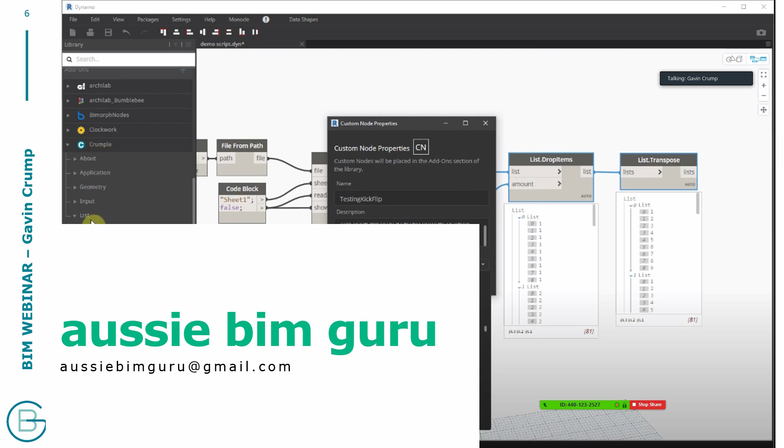Some of you might be familiar with my YouTube channel, called the Aussie BIM Guru. You can always contact me at this email if you've got questions about BIM or Dynamo or other programs. I launched it last March - it's got 150 plus videos, and we've just got over about 5,500 subscribers now, so it's growing pretty fast, which is pretty cool.

I've got videos coming out twice a week typically, and I'm going to try to keep up that momentum as long as I can. I cover a lot of topics, but most of them relate to software, so I show demonstrations of how you can use programs like Autodesk Revit, Dynamo, and Python scripting.

I also touch a little bit on Grasshopper for Rhino 3D, for those that use that program instead. I know that's usually more popular at universities, but I also talk about general BIM management and how you can be a better employee and improve your career prospects.

So my goal with the channel is really just to help other people improve their BIM with professional context, because there's a lot of channels out there that aren't managed by people working in the industry yet. So I find there's a little bit of misinformation, and I try to give you a more honest, professional approach.

So I've got a whole bunch of playlists. I've got like about 63 videos on Dynamo, 42 on Revit, and just made a series on Python from the ground up. So feel free to check them out if you're looking to learn a little bit about those programs. And yeah, I've got plenty of videos. You'll be able to recognize them by this little symbol, the Aussie BIM Guru logo. I've had the same branding since day one, so pretty easy to spot.

Anyway, currently I work in a business called BIM Guru. So similar to Aussie BIM Guru, but a little bit different. This is my consulting business. I launched it at the start of this year, so a very interesting year to begin a business, I'll be honest.

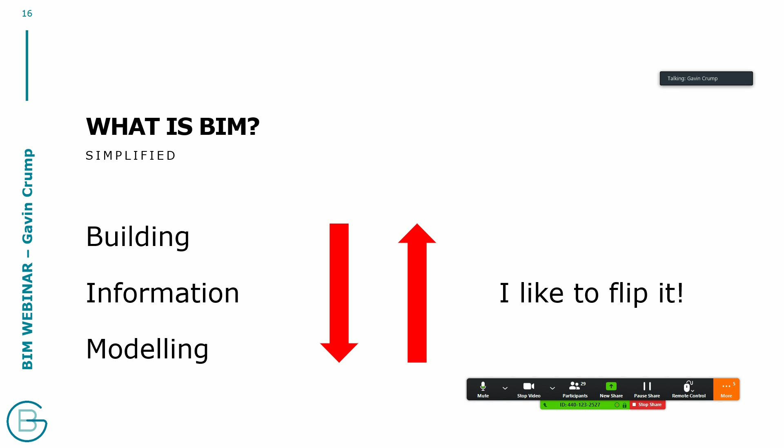So what is BIM? If you're not aware of it, it's Building Information Modeling, that's what it stands for. But when I talk about BIM, I like to flip it and turn it upside down, and I like to say modeling in order to generate information, to construct, to create and support buildings. Because one of the most important things in BIM is it's actually in the middle - it's the information. A lot of people think BIM is just 3D modeling, and it's not. It's so much more than that.

So software in BIM is really important. You can't really do much without it, but BIM is enabled by software. So essentially BIM is really more about process, workflows, and communication.

You can be the best 3D modeler in the world, but if you don't know how to communicate your ideas, it's not really worth anything. Communication is one of the biggest challenges and most important things to refine as a professional, but also in the industry in general. If you run a business, you should be a strong communicator, so it's really important to value this even in BIM as well.

I like to look at BIM a little bit like a barista making a coffee. The end depends on the means, but it's not about the means. The barista isn't just the coffee he makes, he is the process that makes the coffee. Same with BIM - it's the process that generates the outcome.

So who can use BIM? The good answer is you all can. Everyone in AEC can have something to do with BIM in some way, as long as they're involved in the process of generating or using a piece of the built environment. You can do something with BIM.

This could be architects, engineers - not just structural or civil, also mechanical, electrical, hydraulic, fire services, all types, geotechnical, surveyors - but also contractors. If you're on a building site, a lot of builders are now using BIM models in order to track the progress of construction and also to solve problems before they become a problem on site.

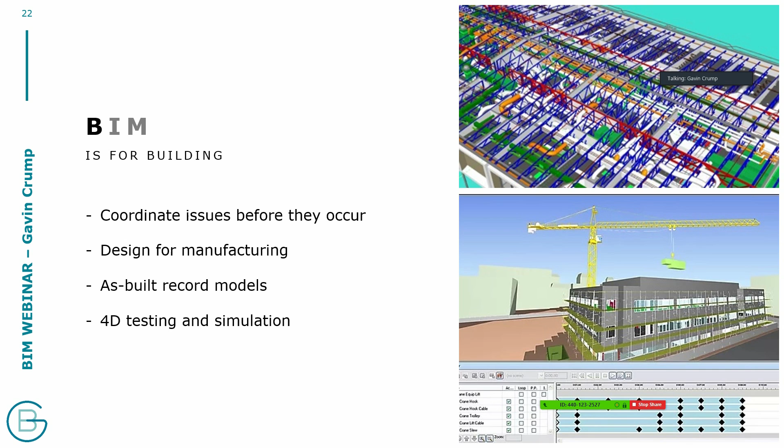Yeah, definitely interesting. As well as this - sounds like there might be someone with their microphone on, just might want to mute.

And now you can analyze every component in that system together. So you no longer have to do really complex calculations on paper. Now the model can actually do a lot of this for us. So there's not as much need for interpretation of elements, which is really time saving for our industry. And it means we make fewer mistakes typically if things are set up properly.

As well as this, we can connect our models to live schedules. So we're no longer maintaining an Excel schedule on the side of an AutoCAD drawing, for example, where there's no connection between the drawing and the Excel, aside from the person that's manually doing everything. So that's a really big time saver.

And we can also connect all our data to databases. So we can now put things on the web. We can web host all of our data, so that we're seeing a lot of really new, exciting, powerful apps that are able to leverage our data much more intelligently than anything could ever have been before BIM.

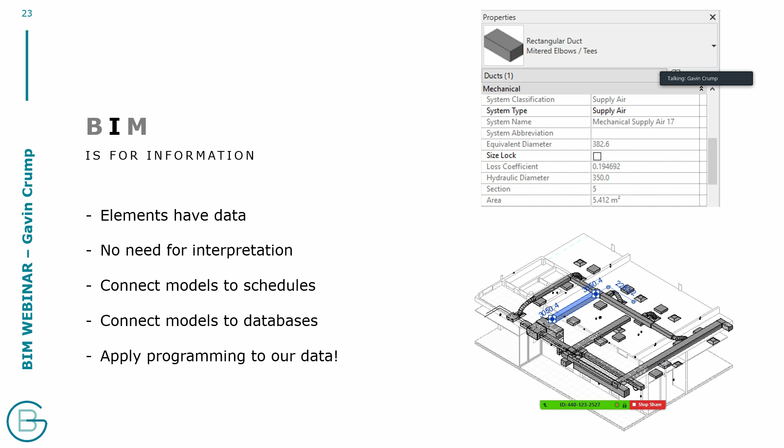And as well as this, we can also apply programming to our data. So we can apply programs like Dynamo and Grasshopper, and even just Python or C# in general, to build apps and scripts that can actually speed up how we work. And I'll cover that near the end of this presentation.

M is for modeling. So you can find issues in 3D that you'd miss in a plan or a section, which is really time saving. And as well as that, one of the great things, which I will show you a little bit later, is that if you update a model in BIM, your drawings update as well, because you're not just seeing a 2D drawing, you're seeing a representation of a 3D model. So when you create a floor plan, you're not drawing that floor plan, you're cutting through your 3D model and then drawing over the top of that. So it's a really powerful way of saving a lot of time in manually updating drawings.

For example, in AutoCAD, typically people used to have to manually draw their sections. And then if a floor plan updated, they had to bring their section in, line it up to their floor plan, and draw these lines to check where things needed to be aligned to. So a big waste of time that we no longer have to worry about.

As well as that, we can walk clients through these models in real time, which is really immersive for our clients, because you've got to remember, in architecture and engineering and construction, a lot of the time the client doesn't understand what we're doing. We might show them a floor plan and they don't know what they're looking at. They don't understand how to read a floor plan, because essentially a floor plan is just a set of instructions. So if they don't know how to follow those instructions, it's not really going to mean anything to them aside from what they can visually see. So this really gives us a lot of power.

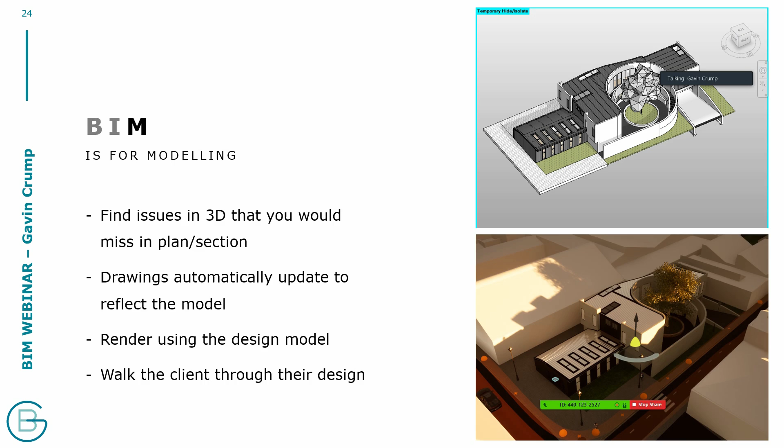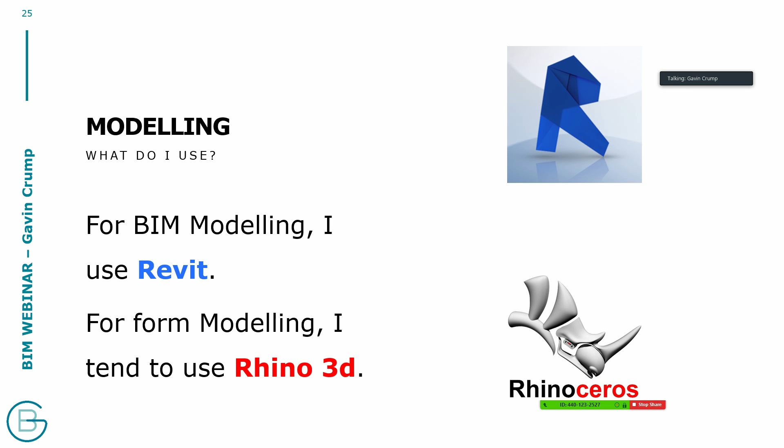So modeling, I guess I'll just touch on the programs that I use. For BIM modeling, I typically use a program called Autodesk Revit. It's one of the major BIM platforms in the industry. As well as this, if I'm doing more complicated 3D form modeling, doing things like modeling with NURBS, which are non-uniform rational B-splines, so double curvature surfaces and more complex geometry, typically I'll use Rhino 3D. I find that these two programs together can do most things that I need.

So this is an example of Revit. I've actually got Revit itself available to show you as an example. So this is a Revit model. I'm in Revit right now. I can go in 3D. So this is my 3D model. And I can also interrogate elements. I can click on them and see their properties. For example, I've got an in situ concrete wall. I can go in its structure and see that I've got concrete that's 200 millimeters thick.

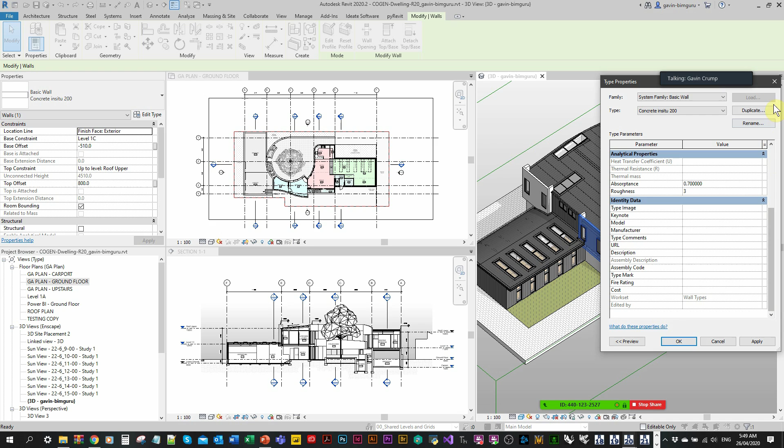And there's more data I can populate if I so choose. This isn't a very data-rich model, but you can see just that there's a lot of fields and parameters that you could populate. You can go far beyond that, obviously. This is just an example.

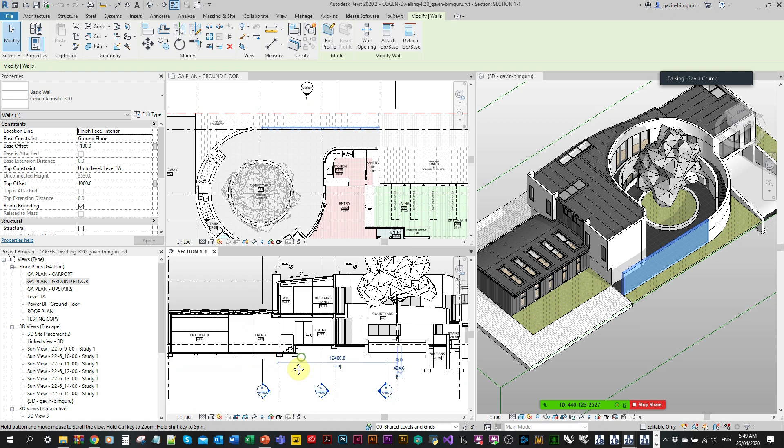But as well as this, I can also look at things in 2D. So I can go to a 2D drawing, but if I select this wall, for example, see I'm selecting the same wall. So now I'm dealing with a 3D, 2D hybrid environment, which is far more powerful. And I've got a section here, so I can look at elements in section, I can see their cut representations, and I can see I'm no longer drawing these. These things are actually generated in 3D. So far more powerful than anything we had before.

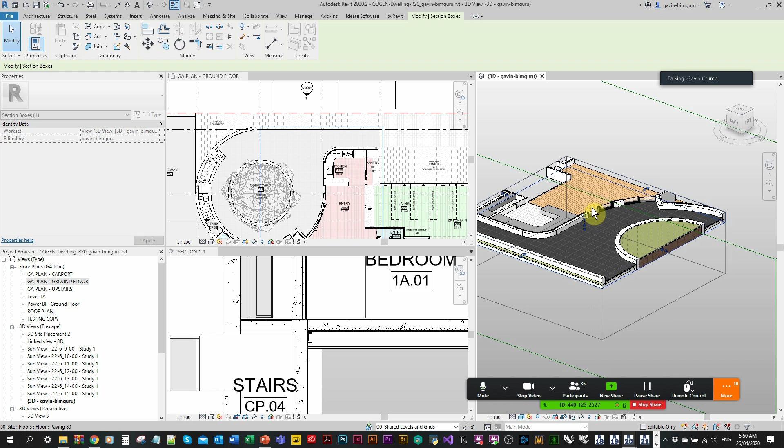And let's say I want to really interrogate an element. Let's say I want to look at this floor in 3D. I can generate a little cutaway and really interrogate my model and get quite a lot of detail out of it. So BIM's sort of like what you put in is what you get out of it. So the more modeling you do, the more detail you'll get and the more information you can extract from your model. So it's quite an exciting thing that BIM does for us. So that's one example of what I use.

But there are other programs too. One of the really popular ones is called ArchiCAD. This is very popular in Europe in particular, run by the Nemetschek group. And I find this is probably the biggest competitor to Revit. And it's a great program. It does BIM really well. There are some things that it does better than Revit. But at the same time, Revit does some things better than ArchiCAD as well.

There's quite a polar divide between the user bases for these programs, mainly because the only way to work between them is to use a format called IFC, which doesn't work too well in Revit. So there are some challenges depending on which program you pick.

But as well as that, there's other less popular but still used options such as Allplan. And then there's some programs that aren't really BIM programs, but are still used in sort of a way that a BIM model would be used, such as SketchUp, which you might be familiar with if you're a graduate. Quite popular because it's got a free version, and also Vectorworks as well. But really, they're not really BIM platforms. So it's more ArchiCAD versus Revit that seems to be the biggest divide, the two most popular platforms.

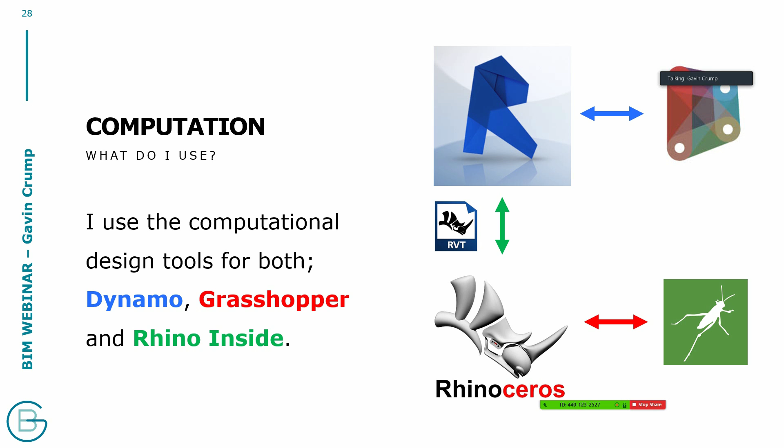For computation, which programs do I use? So typically for computational design, if I'm working in Revit, I'll be using Dynamo, which comes with Revit. Otherwise, if I'm working in Rhino, which is the main reason I work in Rhino, I'll be using Grasshopper, which is far more powerful at processing geometry, but not as good at processing data typically. And as well as that, there's now a tool that's been built by the people that make Rhino called Rhino Inside. And this actually lets you run Grasshopper within Revit, which is really powerful. So I'll show you an example of that shortly.

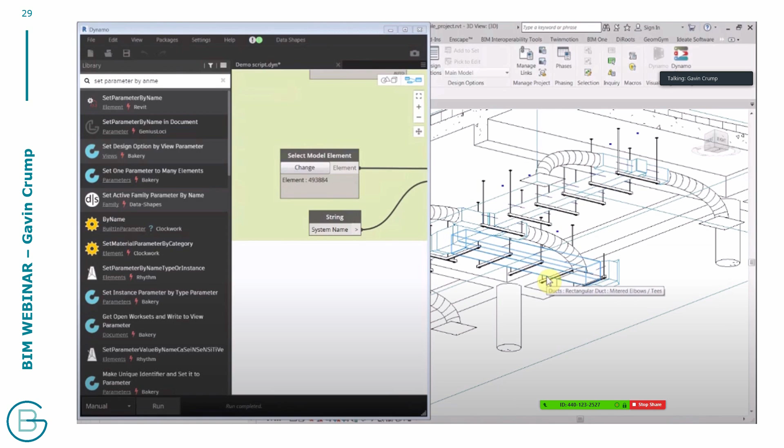This is an example of a Dynamo script I built that essentially takes a duct system, and given a hanging support family, if you select one duct in the system, it goes and supports the entire system for you automatically based on some spacing rules, just all by using a script. And when you run it, you can pick new systems and just keep going. So it saves a lot of time if you can write something in a scripted manner.

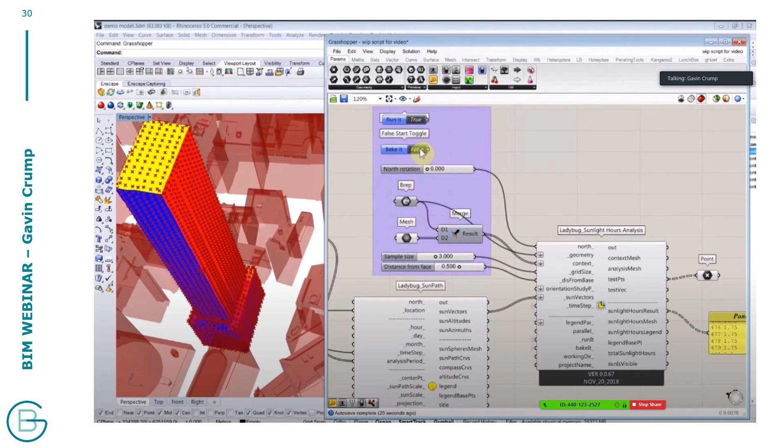This is a software package called Ladybug for Grasshopper and Rhino that deals with solar analysis and other environmental studies. And this is more the power of Grasshopper. It's very fast at dealing with geometry, very complex geometry. For example, if I ran this study in Dynamo, it would crash. It wouldn't handle it. So you can do some very powerful and very abstract concepts using Grasshopper instead.

This is an example of Rhino Inside, which I'll probably actually just show you because I have this ready as well as an example. So I'll just boot up Rhino and I'll boot up Grasshopper. So I've got my Rhino model here and I've got my Revit model here. So this is actually some geometry that's been processed into Rhino, and then I'm analyzing this using Grasshopper.

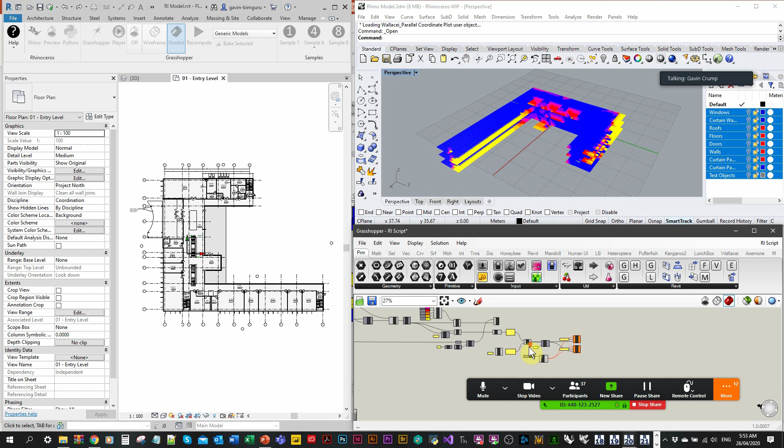So I've got a pretty complex script here. And essentially it's finding how many hours of sunlight every square meter of the Revit model is exposed to based on all the obstructions. So I do have all the Revit elements hiding behind the scenes.

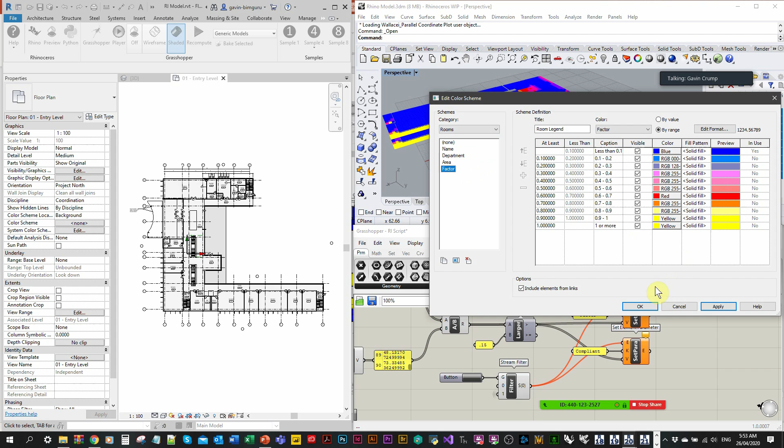But what I can do with this is actually collect this as data. So I can find out how many hours on average each room is receiving per square meter. And I've created a little color scheme that I've applied. And this will technically tell me each room's factor. At the moment, every room thinks it's receiving 0.

If I run my Rhino.Inside script, it'll update all these rooms and tell them with a number how much they're receiving. Then my color scheme can tell me graphically how compliant my rooms are. So you can see the power of just combining a few programs and capitalizing on their strength in order to create a workflow that supports something more complicated.

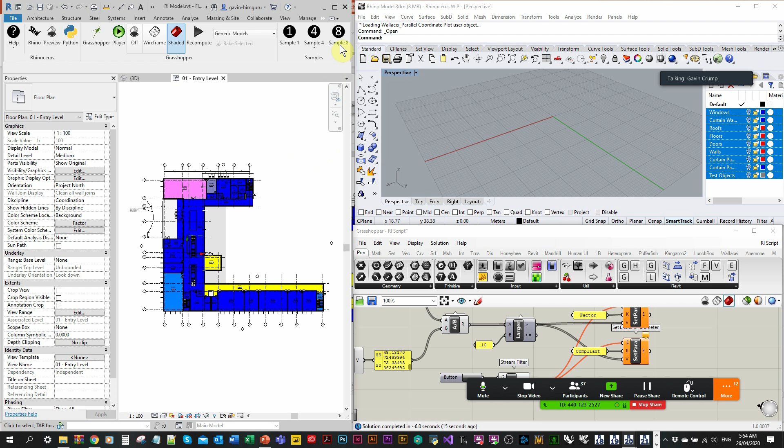I'll probably have to close this program just because it's a little bit heavy when you've got it all set up. So I'll just shut that one down. And it should close down Rhino and Grasshopper. So I definitely recommend looking into that as an option.

So there's some other programs out there as well that deal with computation. One that I'm looking into right now is called Node-RED, which deals with web-based operations, so dealing with servers and databases and websites. So this paradigm of visual coding is getting quite popular, and I'll touch on it a little bit later in this presentation.

But a lot of professionals are actually learning programming. So this is a really interesting thing that we're seeing in the industry. We're seeing people learning not just Python, but also C#, and some people learning JavaScript to deal with web-based applications. So if you like computer programming and you wish you'd become a computer programmer, the good news for you is you can probably still be a computer programmer in AEC.

If you don't like computers, I've probably got some bad news for you in that the AEC industry uses quite a lot of computers. But it's really interesting to see the impact that coding is having on our industry and its efficiency.

So I think there's someone with a microphone on. You might want to mute your microphone.

Anyway. As well as this, now that I'm talking about programming, I should probably mention a company called DiRoots, because one of the people in our webinar, Adeji, a little BIM celebrity, is actually working with this company, and they're raising awareness, and they're doing a great job too. They're a BIM consulting company, so we're not really in competition. I think we all just support each other, and they're developing some free tools and workflows for Revit using programming. So really interesting to see what some of these companies have managed to do.

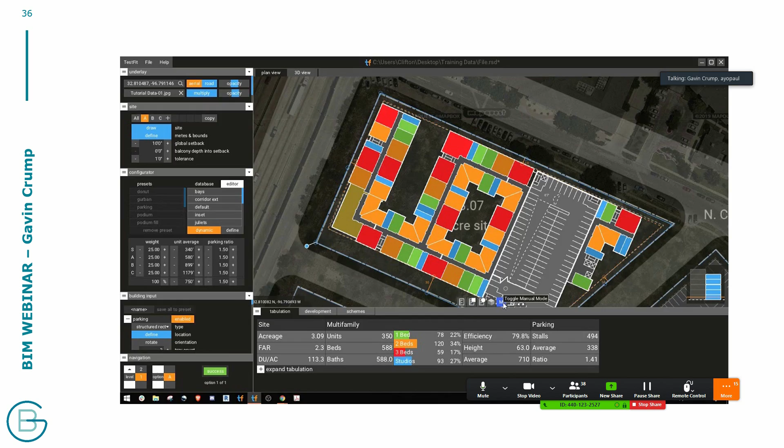As well as that, for coordination, I typically use a program called Navisworks, which works hand in hand with Revit. So this is really important for a process that we call clash detection, which tells us when things in the model are intersecting with other things or they're coming too close to other things. For example, if a duct is clashing with a structural wall. Typically this is a problem because we need to use a penetration, which gets in the way of the structural reinforcement of the wall. So it can be done, but we need to be aware of it. So we can use clash detection to inform us.

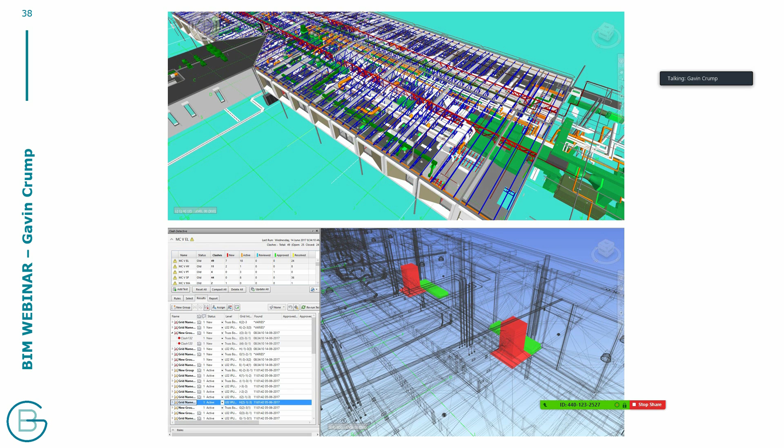And this example I was talking about before is actually also an example of clash detection. So we used this model in Navisworks above to detect issues. For example, down below you can see we've identified when there's some ducts and some lights in the ceiling that are clashing. Obviously you can't have a duct and a light on top of each other. So this forces some coordination to occur between a mechanical and electrical design engineer. So it's a really powerful workflow to be aware of how to use. So I highly recommend people check out these sorts of programs as well.

But I guess another popular alternative is Solibri. This is used typically by ArchiCAD users and some Revit users because it handles the IFC format instead, which is a universal file format generated for the construction industry.

It does sound like, you know, the perfect solution that one file can be read by all programs. It's not quite that simple. I'll talk about it a little bit later, but this is a good alternative at least. This is an example of someone using an IFC model in Solibri.

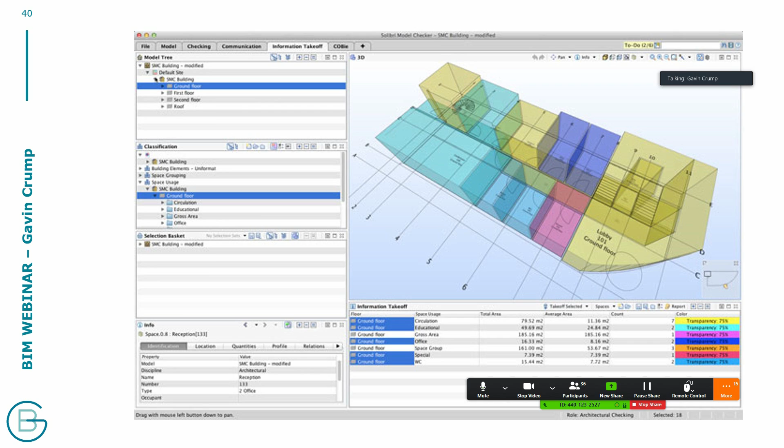For visualization, I use two programs. So I use one program called Twinmotion, which is a derivative of the Unreal engine. So if anyone's ever played Unreal Tournament, the video game, this is actually now a visualization engine in architecture, which is pretty fun. As well as that, I use a plugin called Enscape for Revit typically, but it's also available for Rhino and SketchUp and some other programs, I think ArchiCAD as well, that lets you render in real time.

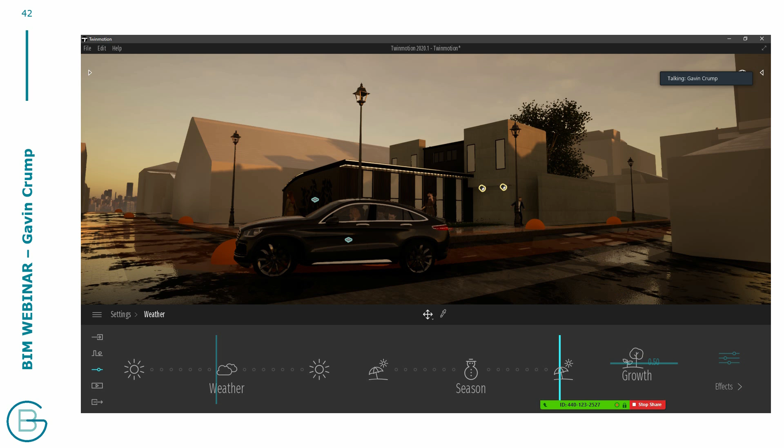So it lets you actually take your BIM model, like this one I showed you before, and put it into 3D. I've actually got this one available to show you as well, which is pretty fun. So you might remember this model I was talking about. So I've actually exported this to Twinmotion, and now I'm in my model. We can see that I can fly around my model. So it's like you're in a video game, right? It's pretty cool. And you can see the graphic quality is pretty decent.

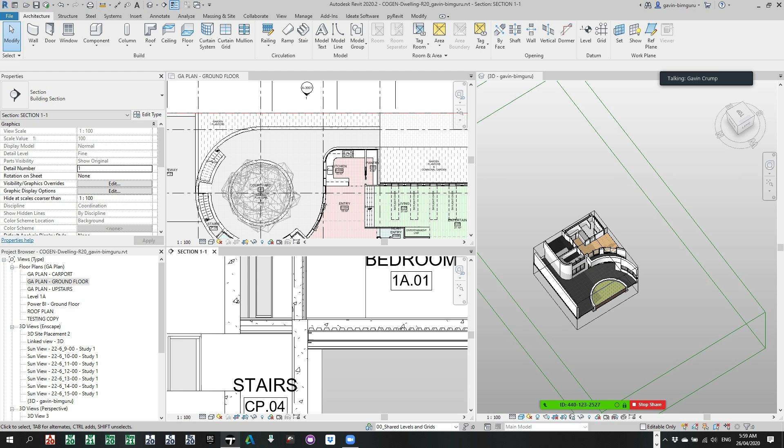And you can have a lot of fun in these programs too. I mean, you can find this little guy and you can make him dance. So you can have a lot of fun with these programs. And there's a lot of really quick things you can do to these models once you've set them up. So if you're showing this to a client and they say, oh, I'm in a snowy region, I want to see what this looks like in winter, I can really quickly just put myself in winter and you can see it starts snowing and everything gets covered in snow. You know, my trees update.

So there's some really interesting features and tools that are coming out like this to support what we do. This program for a while was actually free as well, which was pretty amazing. I don't believe it's free anymore, but if anyone got hold of it before then, congratulations, it's a great program. So yeah, really interesting. You see even the cars are driving around, so pretty fun. I'll just close this one too because that uses a bit of memory on my computer. So we'll just jump back in.

So that was Twinmotion. But there's some other alternatives out there. So some people just use Unreal Engine as it comes. They don't bother using Twinmotion, which is harder, but it gives you more power. It's essentially like designing a video game. As well as that, Unity is becoming really popular. This is a gaming platform essentially that lets you build video games. It was actually used to build a really popular mobile game called Hearthstone, if anyone knows that one. But it's come into AEC now as well. And also Cinema 4D is quite popular.

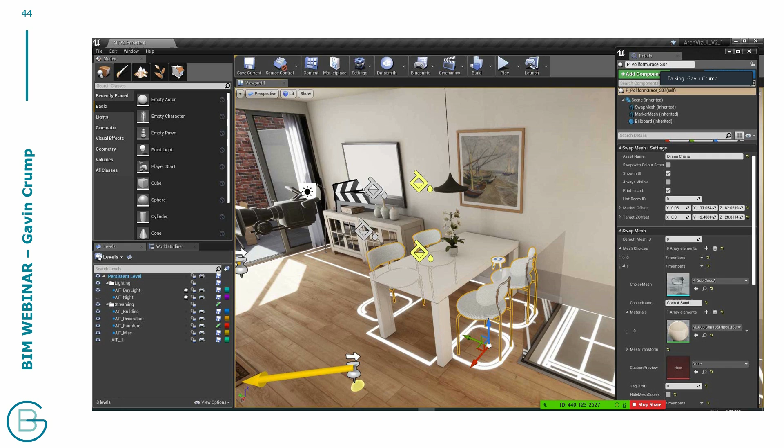This is an example of Unreal Editor and sort of the complexity of the program compared to the one I just showed you. But obviously with complexity comes more features. But there's so many more programs to choose from. I've just shown you probably some of the most popular ones, but there's more programs being made every day. So I guess the question comes, what is the right program to use? We obviously only have so many hours in our day. We can't learn every single program. Well, we could, but we'd probably have nothing else to do.

So I think it's really important to focus on a few things. Pick a program that firstly you need. Don't just learn a program for the heck of it. If you know you're never going to use a program, say don't go and use SketchUp for BIM if you know it can't do BIM, for example. But if you know you can do things with it, then sure, learn it because you might need it. Maybe your business is going to use this program.

At the same time, you have to enjoy it. I find too many people use BIM software but hate using BIM software. If you don't like using the program, then don't use it unless your company forces you to use it, and then find another company to work for that uses the programs you like. I think that's really important. You have to like what you do and you have to be interested in it too. I think if you're not interested in using a program, then again, don't use it, or find ways to work with people using the program but doing what you enjoy.

So if you're going to be an architect and you don't want to model in BIM, that's okay, but you need to learn how to coordinate people that do, because it's integral to how we manage our projects. So don't feel pressured to learn it, but at the same time, feel pressured to understand it. As well, you can always just try programs if you're not sure. Most of the programs I've showed you have free trial versions that you can actually just get a hold of and just try out the program.

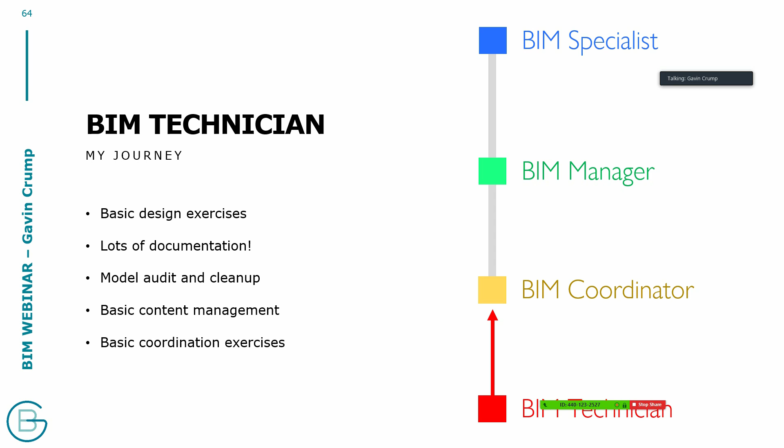And maybe some basic coordination if you're lucky. I was quite fortunate to be given some coordination tasks, actually working with engineers and resolving issues with them. Say like, I need a mechanical duct in this room, but there's no ceiling. Obviously the solution is put in a ceiling, but it was more involved than that. It was like, can we actually afford a ceiling in this room? Or maybe, why isn't there a ceiling? Maybe they've made a mistake. So that basic level of coordination.

But I guess during this time, I did one thing that I encourage everyone to do as early as possible, and that's to self-educate. Find the programs that you're passionate about, or find the techniques you're passionate about. Maybe you're not a BIM user, maybe you're an architect. Maybe you want to learn more about construction. Start researching details. For me, it was to research Revit - that was my big thing. I wanted to learn everything about this program because I knew I wanted to be a BIM manager very early. I loved what this program could do, and I wanted to manage teams that were using this program.

So every night for about 3 months, I learned Revit. I wanted to learn a lot more about the program, how it works, how it can be set up. And I guess projects didn't always teach me everything that I needed to know, because projects are all different. They don't explore every aspect of a piece of software, because a piece of software is built to handle a lot of different things. So if you're putting together a library, for example, you're not going to see the same things that you'd see if you were doing, say, a commercial building.

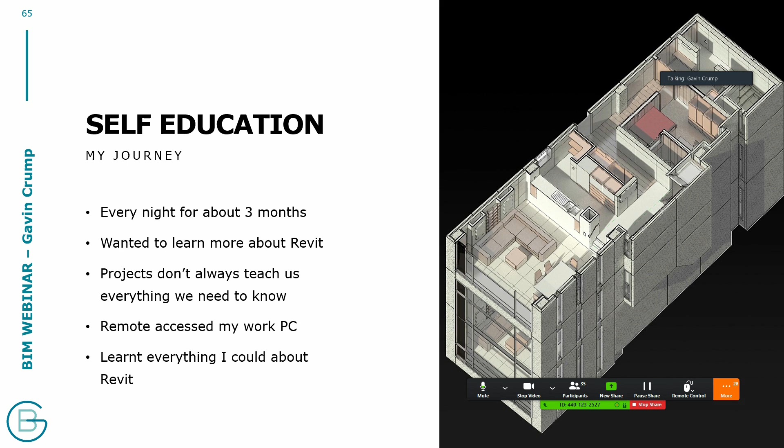For example, in a commercial building, we almost never model any furniture because there's no fit out - you need your tenants to fit out the building. Whereas on a library, obviously the furniture is much more important. So you might not learn how to build content in a commercial project the same way you would on a library. The same as working on a hospital, I didn't learn everything about Revit. So I actually just remotely accessed my machine from time to time to learn this program, and I learned everything that I could about it.

So this really boosted my career. It actually caused me to sort of leapfrog over a role in my journey, which is a BIM coordinator. I sort of skipped that role because I learnt the program so fast and it was so in demand. I managed to, I guess, get the attention of an office that wanted to elevate me up to a BIM manager. And I was very young, I was only 25 at the time. But I guess I saw the opportunity and I took it.

And it was the right choice at the time, but there were some challenges involved. So I think my lesson I learnt here is that you don't want to move too fast. It's tempting to go for the big roles as fast as possible, but you will miss out on things along the way if you skip certain roles.

So as a BIM manager, I moved to Sydney and I started developing all their templates, their library of objects. I started training their company because obviously my skills in Revit were at a different level to most people there, so I needed to elevate their skills as well. And then I got more involved with setting up projects and also working a little bit on BIM projects as well. So it was a big change.

But like I said, my lesson was that I sort of skipped the role. I didn't really learn how to coordinate on projects. I didn't really do a lot of project work until then. I'd only worked on a couple of different projects. And a BIM manager needs to understand a lot of different types of projects because there's essentially just one BIM manager in most companies, but there's a lot of different types of projects.

So again, just try not to rush. Plan out your career journey carefully because you don't want to skip crucial roles in your journey. I think BIM managers always need project and discipline experience. So if your goal is to be like an architectural BIM manager, make sure that you understand architecture, not just BIM, because this will make you more relatable to your peers, and it means that the solutions you give to problems your peers have are more suitable to what they do. As well as that, I think it builds respect. People will respect you more if they know that you've got the background and the experience.

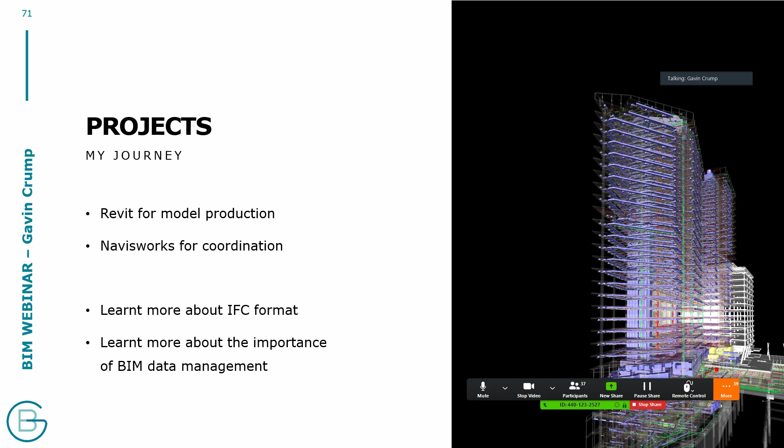And I learned a little bit more about the IFC format during this time as well. So it taught me a little bit more about the power of good data so that you can set up other types of models that can process that data. And I learned about the importance of the management of this data.

This is the hospital that I worked on. So it was an upgrade to an inpatient unit. And this is an example — the coordination example I showed you before is from this project.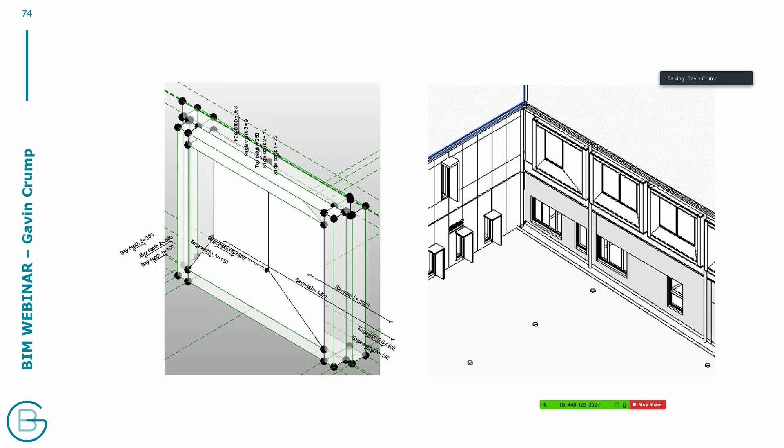But I also learned more about advanced content creation in Revit. So I'm actually really passionate about the creation of good quality and fit for purpose BIM content. You can see here's a facade hood system that I designed using a more advanced technique in Revit, and this could be adapted to suit every single facade hood on the entire project. So it saved the team a lot of time in the long run.

But this is me now. So I actually went back to BIM management for a little while.

I launched my YouTube channel whilst I was a BIM manager because I really felt passionate about giving back to the industry. But I realized partway through that I wanted to help more people. Working for a company can be a little bit restrictive because you're only able to help the people you work directly with. So if someone from the other side of the world asks if I do consulting work, I'd have to say no, I'm sorry, I can't, because I have a contract, and if I do it, I'm breaching my contract.

But now as a consultant, I can help far more people. I can also share a lot more on my channel because I'm no longer locked into intellectual property agreements. So I can show you workflows I couldn't show before, when I worked for companies building their own confidential workflows. It changed how I approach the industry, and I'm getting a lot more involved in the global BIM community. Social media connects us all now, and if you use it properly, you can get a lot of value from your network.

So this was me going back to BIM management before, working on more projects. But one thing that really changed what I did with BIM is I started to explore computational design—applying coding to what I did. This really changed my focus on what I promote in the industry, so I'm much more enthusiastic about programs like Dynamo, for example. I'll touch on this a little bit later.

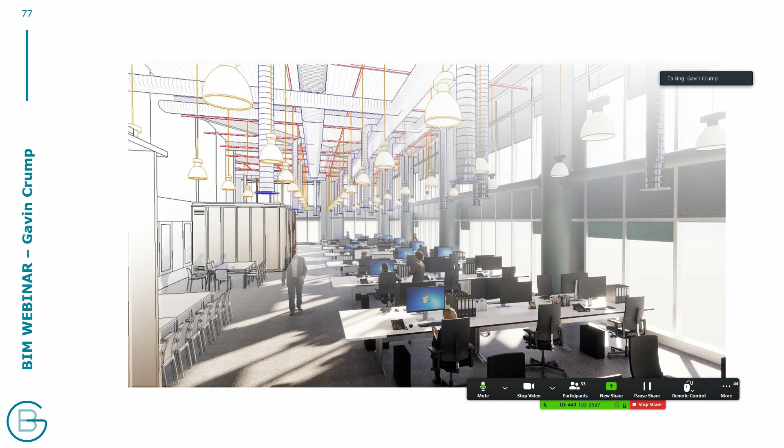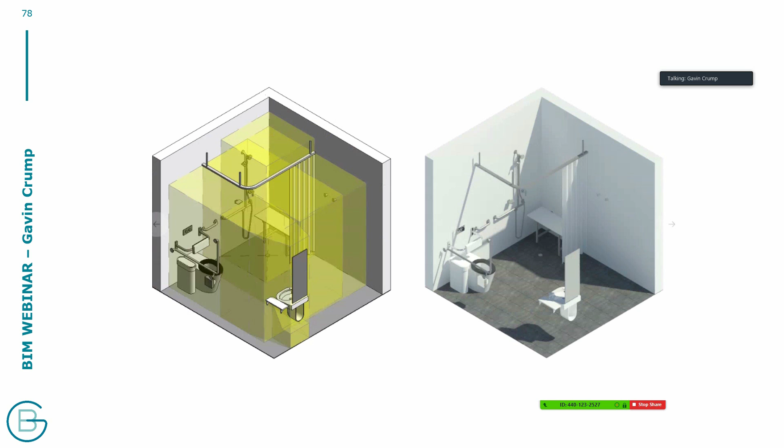And what we could do with these is actually clash detect them in Navisworks. You could automatically detect any non-compliant bathrooms in your project, rather than going in and visually looking at them and needing to understand the standard down to the millimeter. It taught me more about the value of taking advantage of data and understanding fit-for-purpose content that can really help users more than just a 3D toilet can.

I also learned more about computation. You can see here an example of a cityscape, where we needed to analyze the impact a building had on the urban fabric around it. In this case, we generated a diagram, then generated one after to show the number of grids in the hemisphere that the building was blocking. This enabled us to go back to our client and tell them the impact our building was adding to the urban fabric.

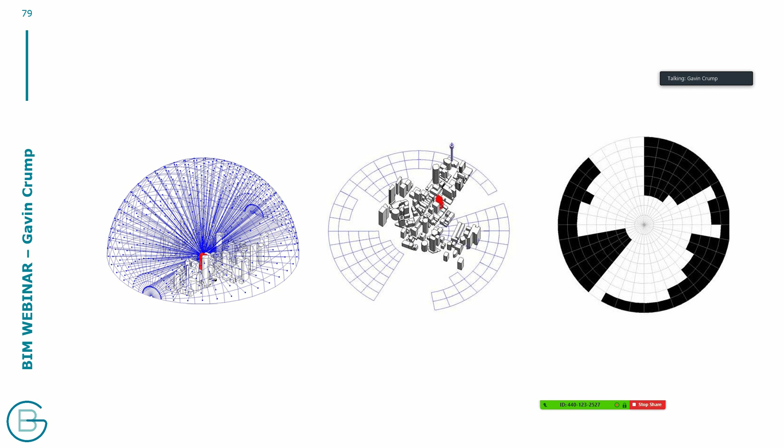But yeah, I moved on to be a BIM consultant—this is the latest step in my career journey. I really did enjoy being a BIM manager, that's one thing I have to stress. A lot of people assume I just quit out of frustration with the industry, and that's definitely not the case. I was actually very happy as a BIM manager, but I just wanted to help more people.

I felt obligated to share my knowledge with more people through a business instead of just a YouTube channel, and I'm so glad I did it. But like I said, being at one company can be a challenge. So if you're ever at a company and feel like you need to do more with what you do, consider opening a business.

So some challenges that I faced in my career at the time. One thing was that learning resources were hard to find. Not only free ones or paid ones, just in general. There weren't really as many resources around at the time. So a lot of my learning I did myself on my own at home, in my room with my computer. And nowadays, luckily, that's not the case. There's a lot of things out there.

I always had to play catch up as well because the industry moves quickly, very quickly. If you are moving into BIM, just be aware that you'll have to learn a lot because we've come a long way. So every time someone joins BIM, they essentially have to catch up to the pack. So expect that if you're jumping in BIM now, you're probably going to be playing catch up for maybe 3 years at least before you really understand how BIM can really work on projects. So you will have to have patience with that.

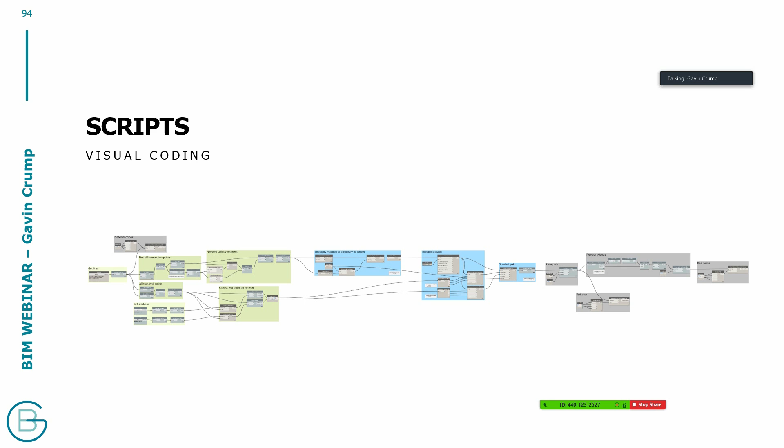And eventually you put them all together, you group them all together, and you get a script where everything works from left to right. This is a Dynamo script here, for example. This particular script, I think, is finding out the shortest path on a roadmap. So it's a very particular script, but they can do some very useful things. So again, to reiterate, I typically use Dynamo, but sometimes I use Rhino and Grasshopper and Rhino.Inside.

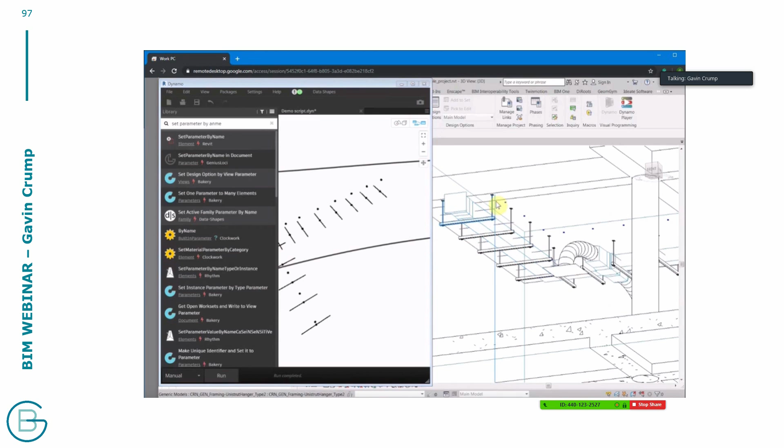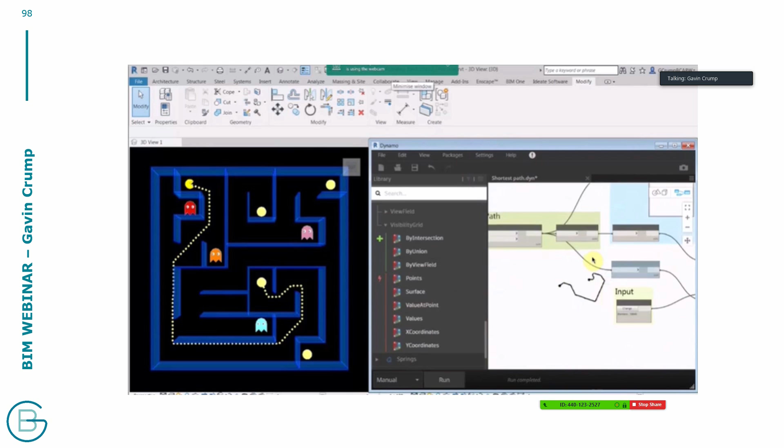There's that duct placement support workflow that I was talking about before. I even built a shortest path generator and then just built a little Revit model, just Pac-Man, just to show the concept. But this can be used for fire escape, to find the shortest possible escape distance out of a building.

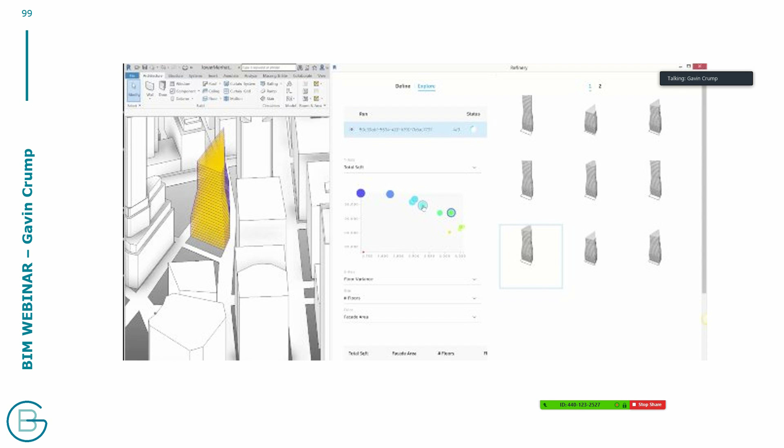As well as that, this is a generative design tool. This is what we call Project Refinery, which is coming in Autodesk 2021, so Revit 2021. And this is sort of an example of those options that you can visually start graphing and selecting from. So you can see just some power, especially for early stage feasibility planning.

There's a series by a guy called David Rutten, who made a really great Grasshopper beginner series to get you started. Obviously my YouTube channel, but also DiRoots, they have a basics and now an advanced Dynamo course as well, which is quite good. And also just LinkedIn Learning. There's a lot of courses on LinkedIn Learning, and just experiment too, obviously.

But I guess my parting words to you all from my presentation: go into the world as a graduate and be bold, be curious, be optimistic, and above all, be collaborative, work with other people. But that's the end of my presentation.

I hope you enjoyed it, and I'm happy to take any questions if anyone has them. I'll probably just check the chat to see if any have come in there. But yeah, thank you for watching, and I hope that was valuable. Yeah, thank you very much, Gavin. I really appreciate you coming to this session. We have a lot of questions from the chat box. I'll write them down. Excellent. I'll just try and find the chat box and expand it. Okay, yeah, we've got quite a few.